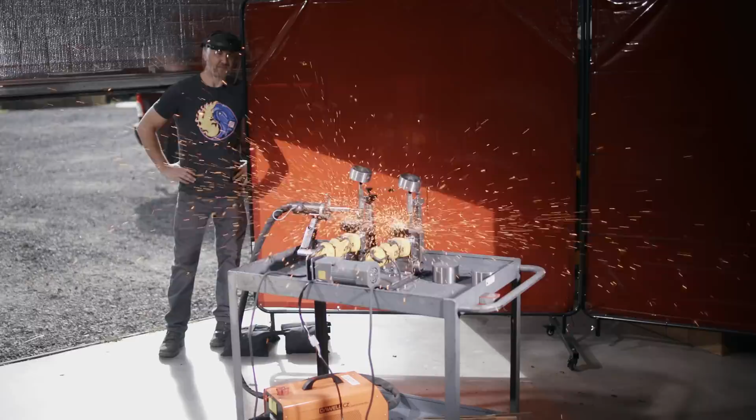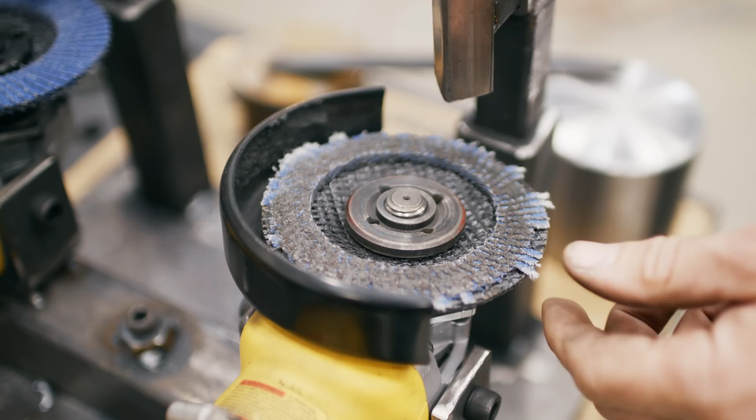This is my disc destroyer. It's a mean little machine with one job, testing grinding discs. With so many grinding discs and countless reviews, it's hard to separate fact from fiction. This is where the disc destroyer comes in. It cuts through the noise, delivering real results. No bias, no sponsorships, just cold hard tests.

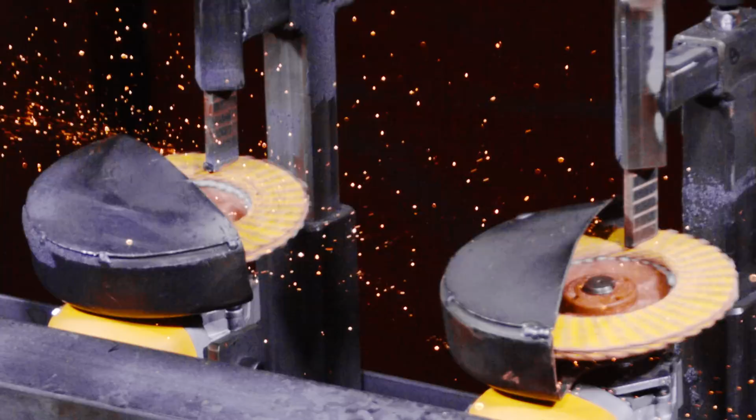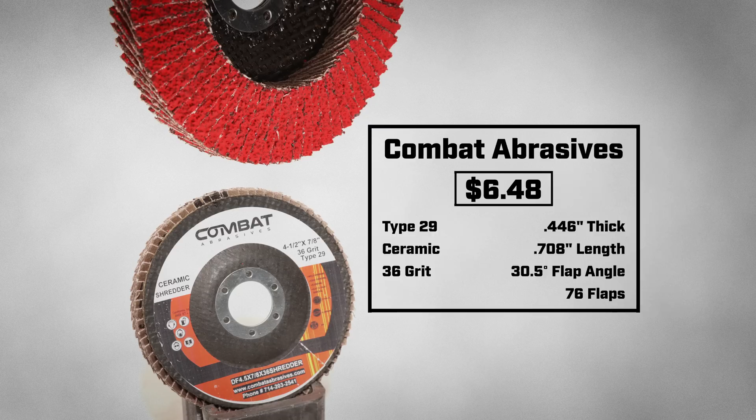Grinding discs can face a lot of real-world challenges, like high and low pressures, hot and cold materials, and of course, fast and slow speeds. This machine tests it all, so that we can finally find the truth in the reviews. Today I am testing the Combat Abrasives Type 29 flap disc coming in at $6.48. Online, this disc has received reviews ranging from highly positive to highly critical.

Satisfied customers say this disc was worth the money and takes off lots of material. This reviewer says it grinds down their welds fast. Even critics agree the disc is an effective grinder, but draw issues with its short lifespan. So which of these reviews stand up under scrutiny and which fall apart? Let's test them to find out.

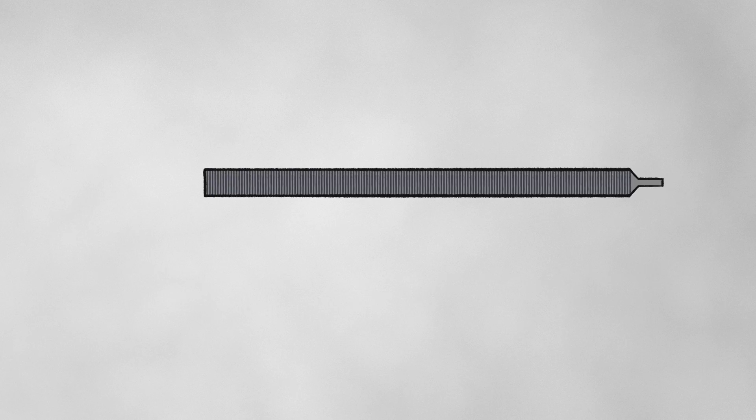Let me break this down for you. Each disc will be grinding this test bar to see how much it can remove within 20 minutes time. This will chart out its story and tell us exactly how this disc behaves based on how much material it removes at any given point. But if the disc stops effectively grinding the bar or just straight up disintegrates, the test is over.

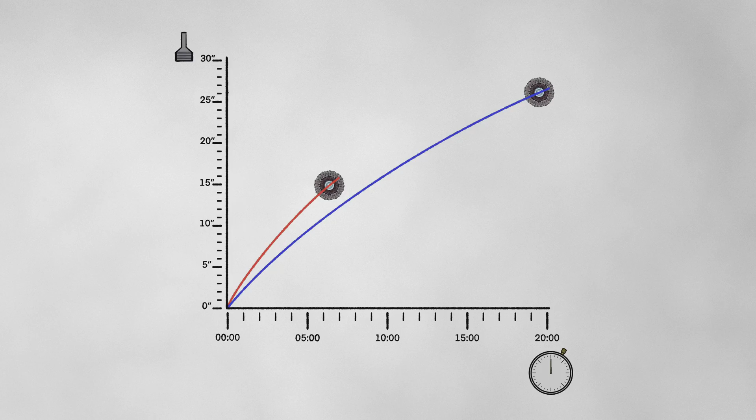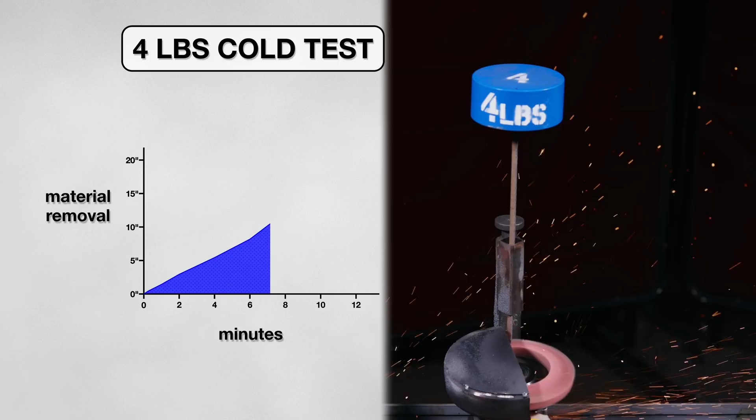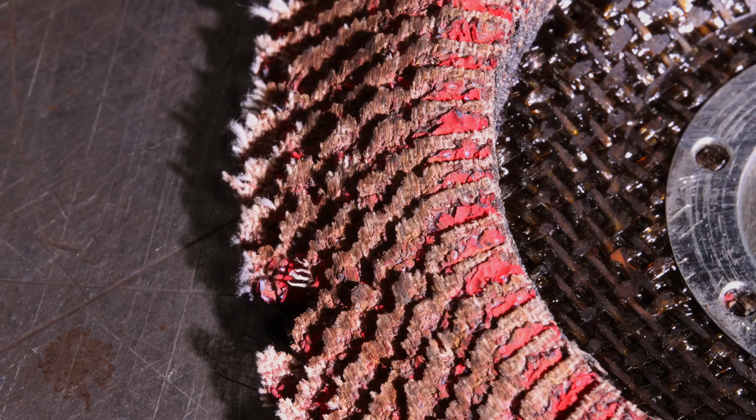Taking a closer look at the coupon, I measured over 18 inches of material had been removed. It's safe to say this disc has the potential to eat a lot of metal, just as the reviews had mentioned. But can we expand the disc's lifespan? This reviewer mentioned it performed really well when grinding down their welds, so let's test that.

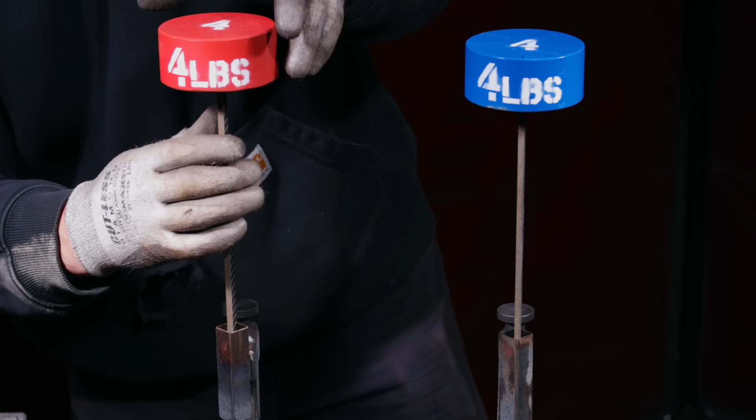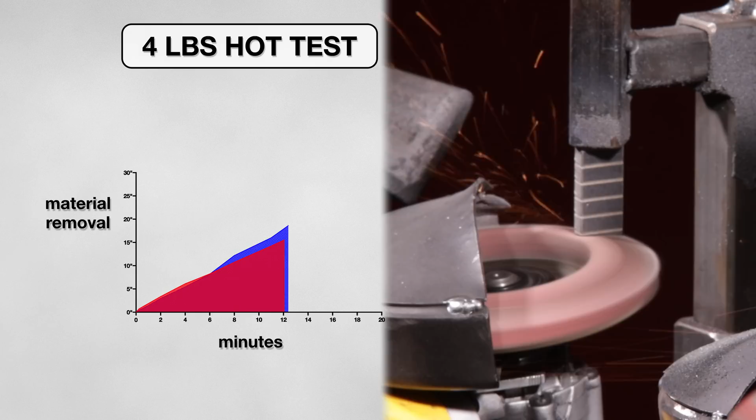For the next experiment, I kept the same weight, but heated the first few inches of the coupon to simulate grinding on a hot weld. This time, the disc showed improved durability. By 12 minutes, it was still grinding, with no signs of smoking. The disc continued grinding for another 7 minutes before I inevitably observed smoke and stopped the test.

Over 24 inches of material had been removed from the coupon, but the disc did not fare well, showing lots of damage ripping down to the backing. It seems the hot metal gave the disc an edge early on, cutting at the same rate as the cold test, but vastly extending its life. These results are fitting nicely with the more positive reviews, but how can we extend this disc's life even longer?

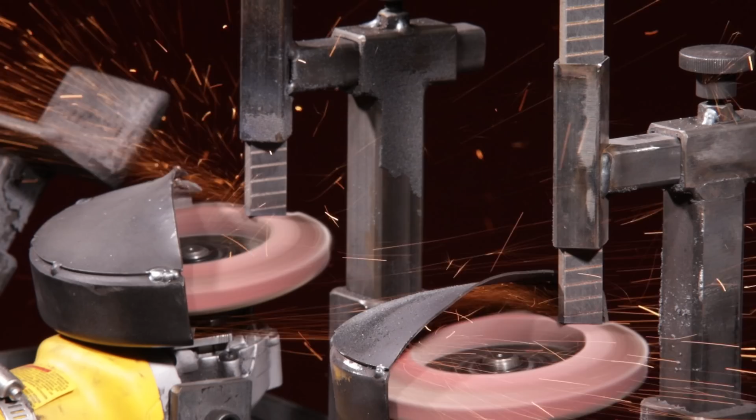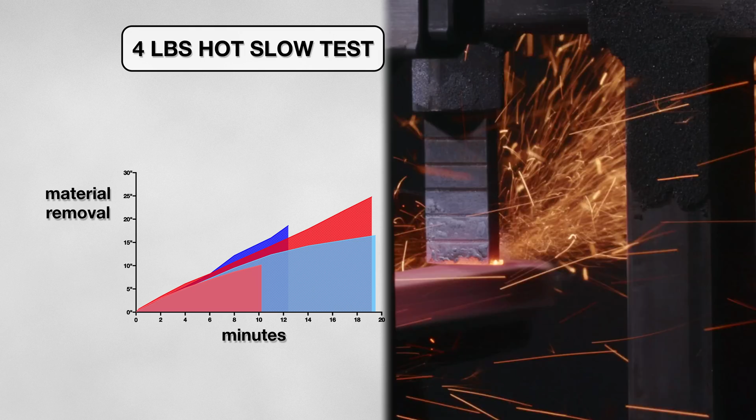One variable we can switch up is the grinder speed, possibly reducing the damage done to the disc over time. So I kept the 4-pound weight, but slowed my grinder down from 11,000 RPMs to 6,000. And this test gave some interesting results. Against the cold and heated metal, the disc saw improved durability, both lasting over 19 minutes before I observed smoke again. But this came at the cost of efficiency, removing much less material, about 10 inches less in both tests.

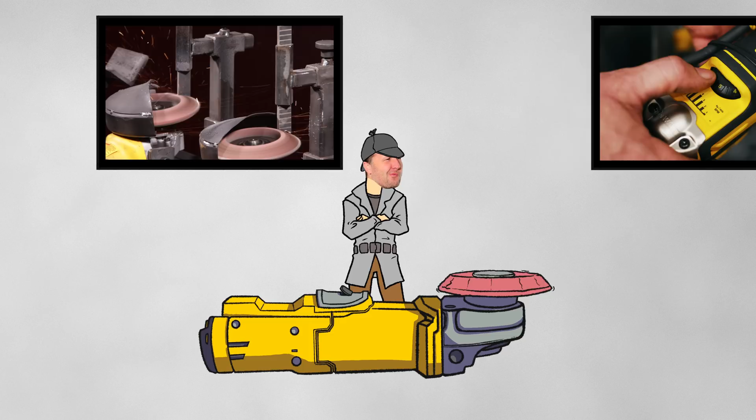So what's going on here? According to the data, it seems these discs are bound to smoke after too much use. And lowering the RPMs while extending the life also means a slower removal rate. One thing we can adjust to hopefully increase its removal rate is increasing the weight. So I put the speeds back to 11,000 RPMs and switched out the 4-pound weight for 8.

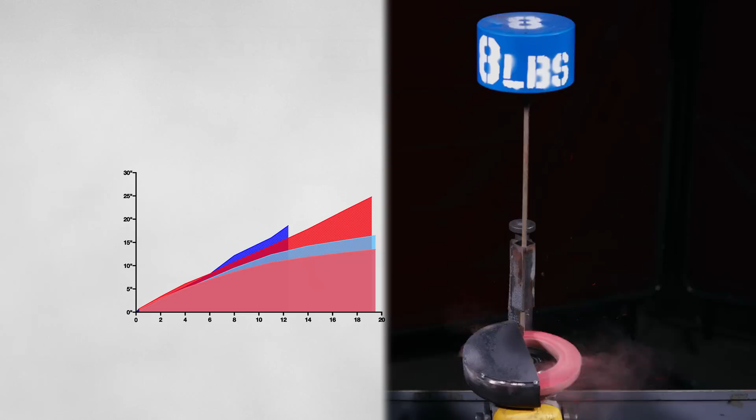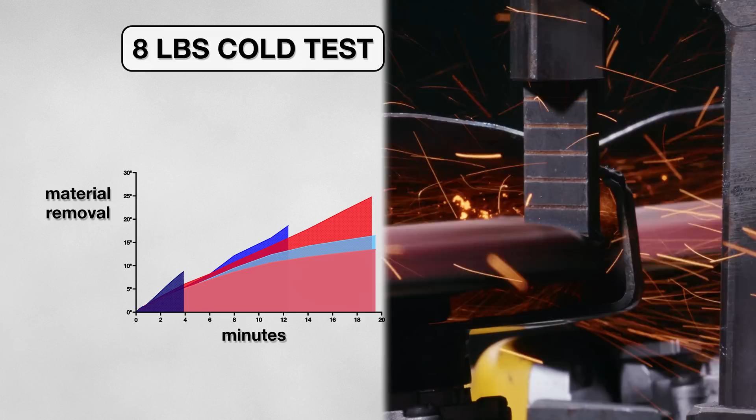And with the added pressure, the disc became a glass cannon. At first it was very promising, showing a faster removal rate out of all the tests so far. But this came at a great cost, showing signs of damage early. 4 minutes into the test, the disc began smoking, signaling me to end the test. The disc was able to cut an impressive 9 inches within its short window of use.

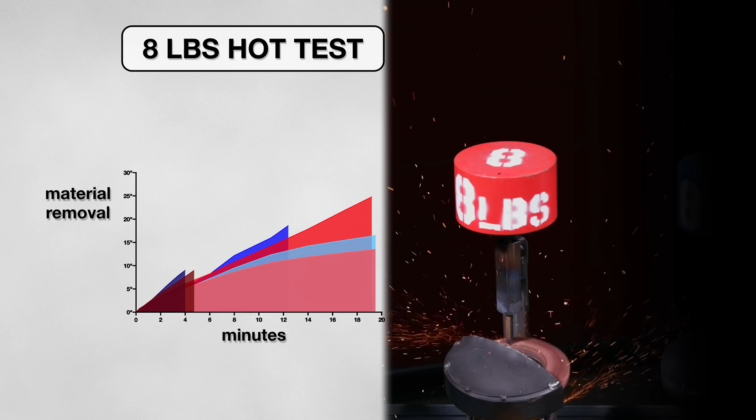So I once again heated up the first few inches of the coupon, this time with the 8-pound weight, and I let the disc go to work. And like the cold test, the disc was eating material at incredible speeds. But even with the heated metal giving the disc a head start, it wasn't enough. At 11 minutes, the disc began to smoke and deform, ending the test. Despite ending earlier than I would have wanted, the disc was able to cut 21 inches off the coupon.

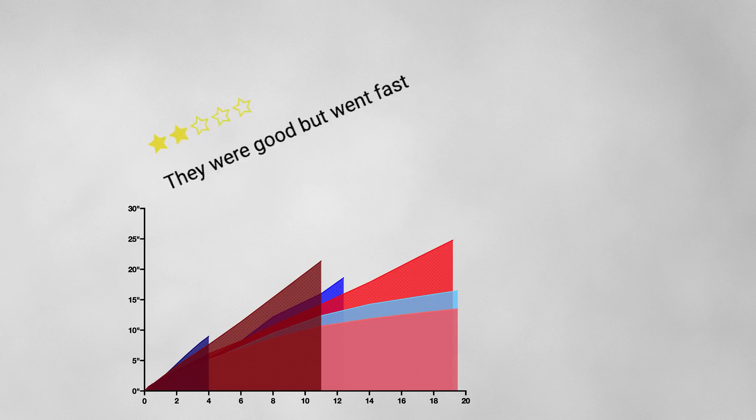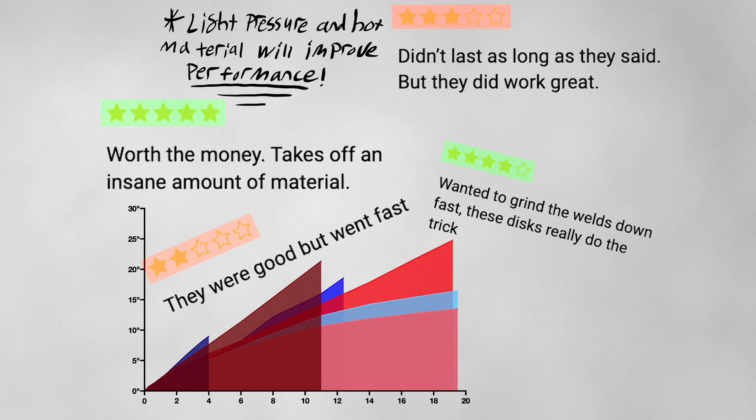So do these reviews still hold up? According to the data, experience comes down to how much pressure you're using. Favorable reviewers likely used light pressure and ground over hot metal for the best results. In contrast, negative reviewers probably applied too much pressure on cold metal, causing the disc to wear out quickly.